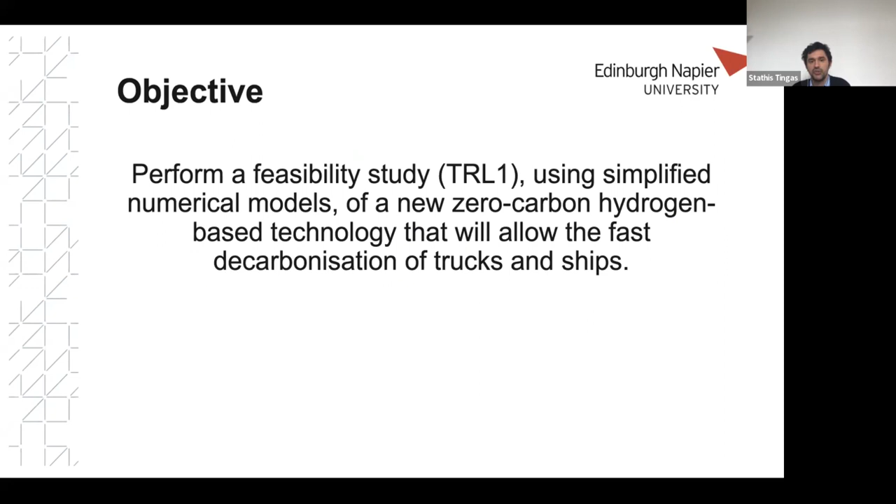In a nutshell, the objective of the current project is to perform a feasibility study using simplified numerical models of a new zero-carbon hydrogen-based technology that will allow the fast decarbonization of trucks and ships. I will first talk about the motivation of this work to introduce a green ignition promoter. Then I will briefly highlight the aim and individual objectives of this work. Next, I plan to dedicate most of the time discussing the results obtained so far, and at the end I will also discuss the remaining elements of this work.

As I already mentioned, the project focuses on heavy-duty transport applications like ships and trucks. But why? What's the problem there? Well, the decarbonization of these applications through electrification has not been very attractive so far, and there are many reasons for that. I'm not going to discuss them here, but there seems to be a consensus both among policymakers and the research community that there is no clear solution to their decarbonization.

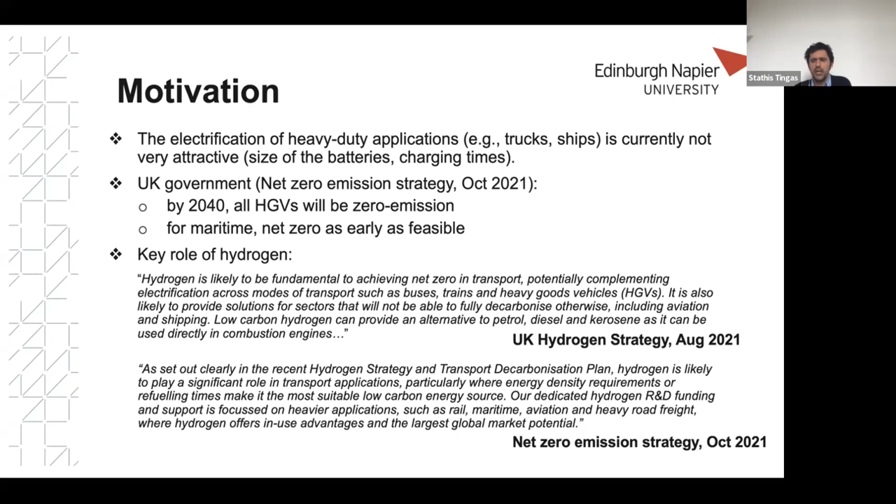Yet the UK government has set clear goals in this regard. All trucks will need to be zero emission by 2040, and notice that this is a decade later than the 2030 ban of all new diesel and gasoline vehicles. With regard to ships, the aim is to reach net zero as early as feasible. At the same time, hydrogen has been identified as a key player in the decarbonization of our society, not only in the UK but also globally.

So one question can naturally rise, which is: can we use hydrogen to decarbonize these heavy-duty transport applications? Well, there is the option of fuel cells, but they are typically quite expensive, so the industry is not very keen to buy into the idea. Ideally, we would like to have a technology relying on retrofitting.

Now, both ships and trucks are predominantly powered with compression ignition engines. So can we just replace diesel fuel in these engines with hydrogen? Well, it's not that simple, because hydrogen simply wouldn't burn. Hydrogen has many unique features, and one of these is its very high autoignition temperature, which explains why it does not burn in conventional compression ignition engines.

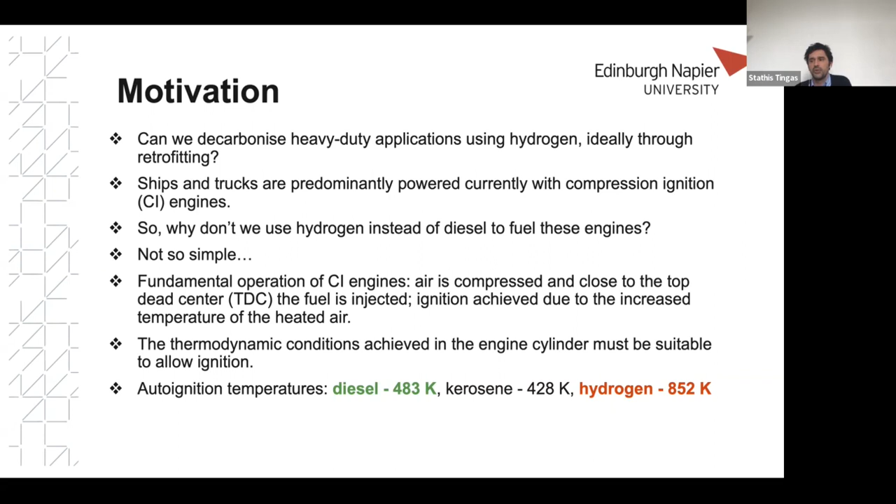Okay, so how can we tackle this? How can we basically burn hydrogen in compression ignition engines? Well, three strategies have been proposed so far. The literature for the first two is quite scarce. The last one is more popular, and you will see why.

The first approach is to use very high compression ratios, above 30. High compression ratios mean that the in-cylinder temperature will be sufficiently high to enable the ignition of hydrogen. Compared to the typical range of 15 to 20 that conventional compression ignition engines currently operate, this basically means engine redesign, which is not cost-effective.

The second approach is to use a glow plug. This glow plug will preheat the in-cylinder air or the in-cylinder charge. This is not actually a bad idea, but the preheating leads to decrease of the engine performance and in certain cases also to high NOx emissions.

Now, the last approach is to use a small quantity of a second fuel, usually called a pilot fuel, which is more reactive than hydrogen in order to initiate the ignition. There are many benefits with this approach: one is the flexibility in operation, other is the increased efficiency, and many others. But so far, only carbon-based fuels have been proposed for use. In fact, most of the times, the pilot fuel was proposed to be diesel.

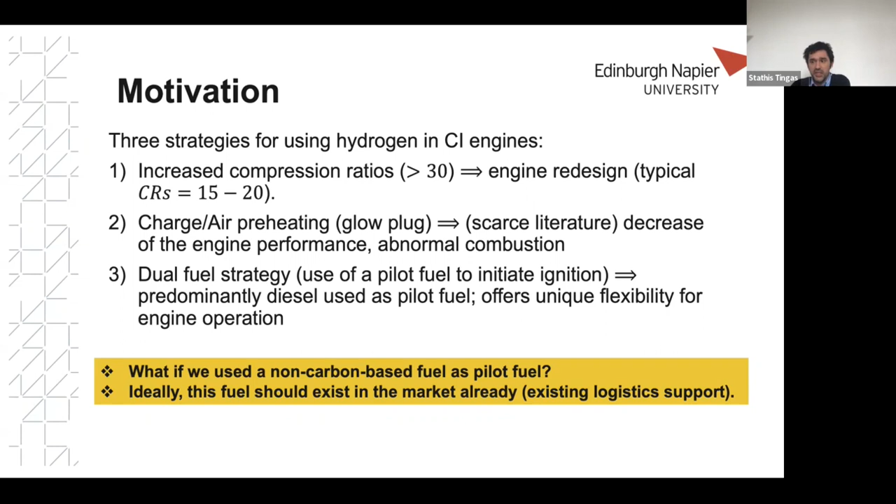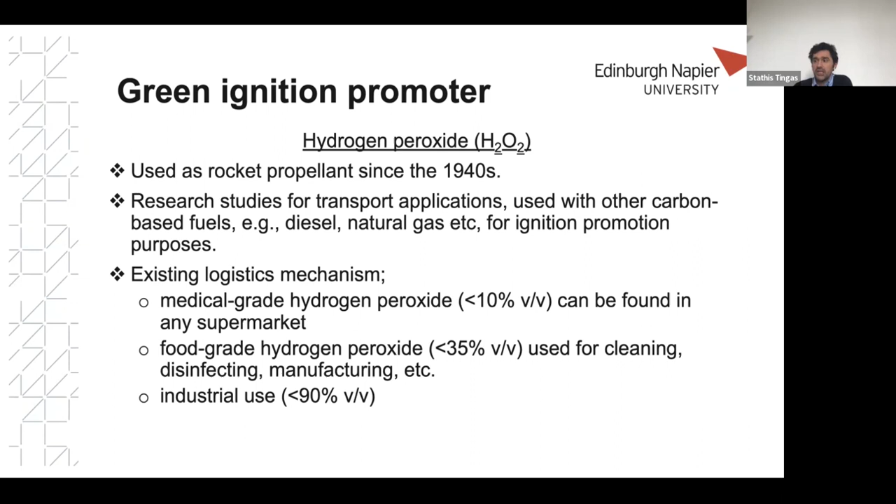So is there any such substance? As a matter of fact, there is. It is hydrogen peroxide, and you can literally find it in any convenience store or supermarket in diluted form, diluted in water. The idea of using hydrogen peroxide in combustion is not actually new. It dates back to the 40s, when it was first used as a rocket propellant and fuel for submarines. But apart from military and aerospace applications, where it is used even nowadays, it has also been used in transport-related applications, where it has been used as an ignition promoter, just like we propose in the current project.

So what we propose is the use of hydrogen and hydrogen peroxide blends to enable combustion in compression ignition mode. We also consider water dilution for two reasons. Firstly, because hydrogen peroxide would most probably need to be diluted in water anyway. And secondly, because water dilution is an established method for reducing NOx and mitigating abnormal combustion.

Given the limited resources and time in the current project, we have been using simplified numerical models to explore the feasibility of the proposed method. Our investigation includes two branches: the homogeneous charge compression ignition mode, the HCCI mode, and conventional compression ignition mode - basically, pre-mixed and non-premixed combustion modes.

Due to the limited time, I will be discussing next the results from the HCCI mode, which is the work package I have been leading, while the compression ignition mode is led by Professor Manosh Paul. Our investigation focuses on engine performance characteristics, combustion phasing, and NOx under various conditions. We are also aiming to touch on the limitations of abnormal combustion as manifested by increased pressure rise rates, and to provide some insight on the available injection strategies.

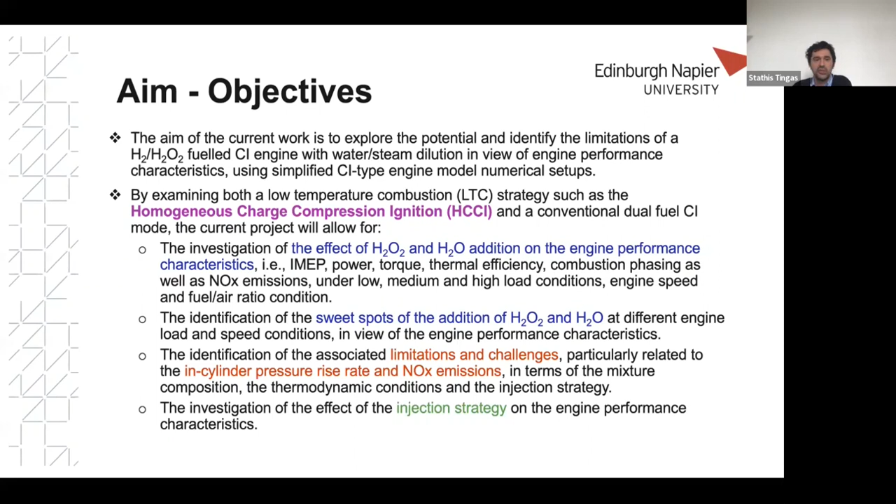I already mentioned that the model we have been using is fairly simple. It is a zero-dimensional single-zone HCCI model available in the Chemkin Pro suite, which solves the species and energy equations along with an additional equation for the volume change. The engine cylinder specifications, typical of a conventional compression ignition engine, are shown in the current table.

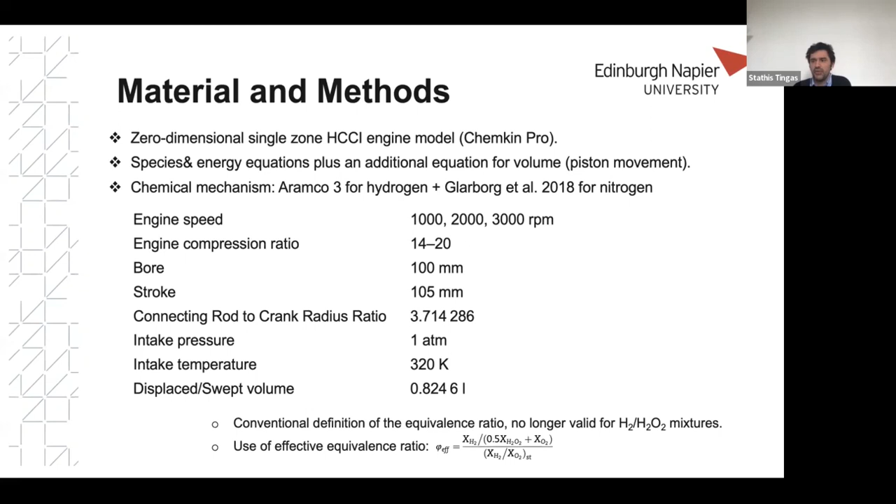One thing to note is that although we did investigate a range of compression ratios, in the following I will only show results for the case of compression ratio equal to 17, since this is more relevant to the applications we are interested in. Another point to highlight is that the conventional definition of the equivalence ratio is no longer valid, so we have been using an effective equivalence ratio defined as shown in the current slide. I have organized the results in two sections. In the first, we only consider hydrogen and hydrogen peroxide blends, so no steam addition.

These results have recently been published in the International Journal of Hydrogen Energy, so you can find more details there.

For this case, I will start with a comparison against the glow plug approach, that is the preheating of the mixture. Then discuss the effect of hydrogen peroxide addition on the engine performance and close with the investigation under constant and low load conditions. The second section includes steam dilution as well. Unlike the first part, these results have not been published yet since we're currently working on the manuscript. Firstly, I will present a comparison against the glow plug approach, then discuss the effect of both hydrogen peroxide and steam addition on the engine performance, and close with the investigation under constant and high load condition. So let's start with the first part.

Now, the investigation was performed in a range of equivalence ratios and engine loads. Each case of hydrogen peroxide addition is compared against the respective glow plug approach, which means we remove the hydrogen peroxide and properly increase the inlet temperature. Now, for a fair comparison, we ensure that the ignition occurs at exactly the same crank angle degrees between the two cases.

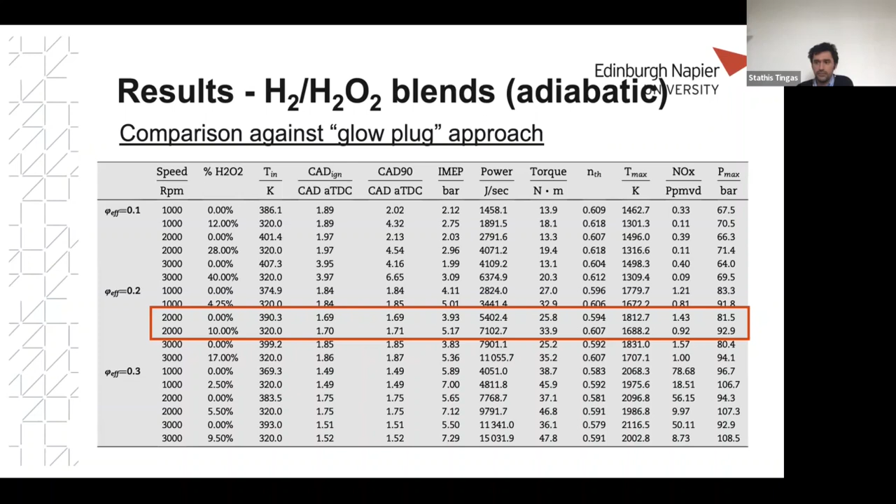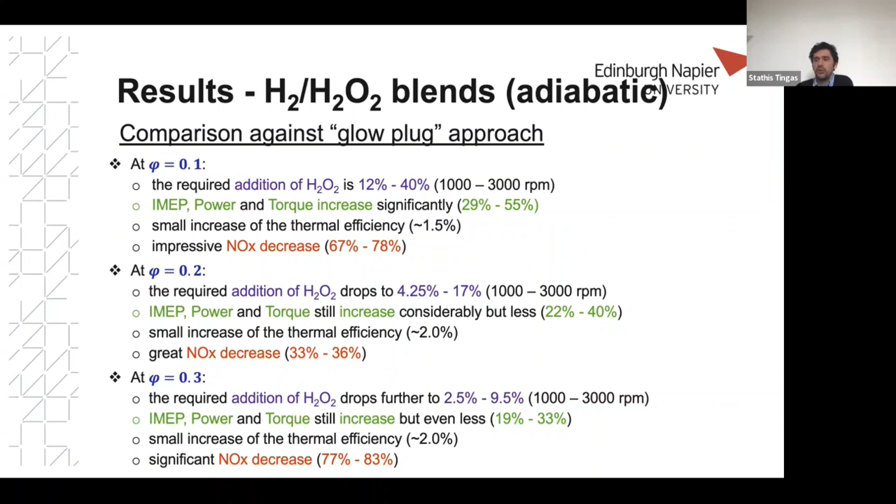In summary, the comparison against the glow plug approach reveals that as the mixture becomes richer, firstly, the required hydrogen peroxide addition to achieve ignition at roughly 2 angle degrees decreases substantially. Secondly, Imep, power, and torque all increase significantly with the addition of hydrogen peroxide. But as the mixture becomes richer, their increase drops. On the other hand, hydrogen peroxide addition also affects thermal efficiency and NOx. But as the mixture becomes richer, its impact remains unaffected, in that thermal efficiency only slightly increases while NOx decrease substantially.

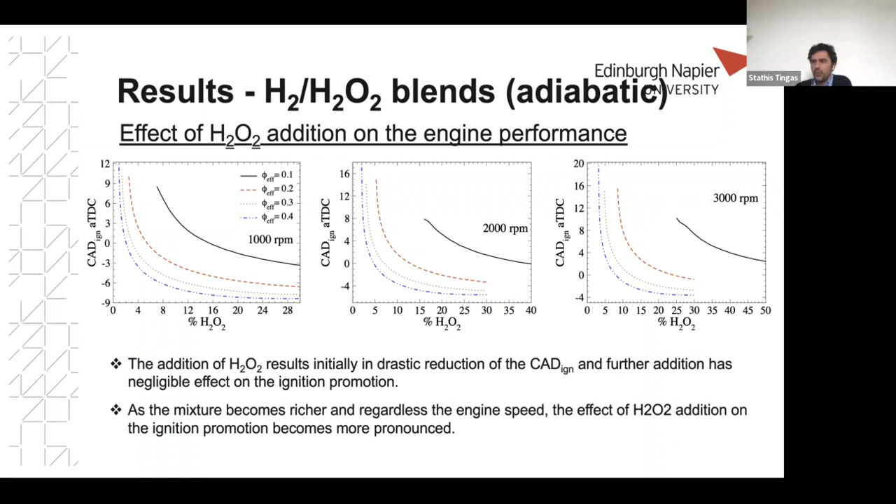The results already discussed provide us some insight as to what to expect when we are investigating the incremental increase of the hydrogen peroxide content at the initial mixture. So in terms of the ignition crank angle degrees, the addition of hydrogen peroxide results initially in drastic reduction of the ignition CAD, and further addition has negligible effect on the ignition promotion. Therefore, the ignition CAD levels off. This profile becomes attenuated at very lean conditions, that is at phi equal to 0.1. And in fact, as the engine speed increases, the dependence of ignition CAD on the hydrogen peroxide becomes roughly linear. In essence, as the mixture becomes richer, and regardless the engine speed, the effect of hydrogen peroxide addition on the ignition promotion becomes more pronounced.

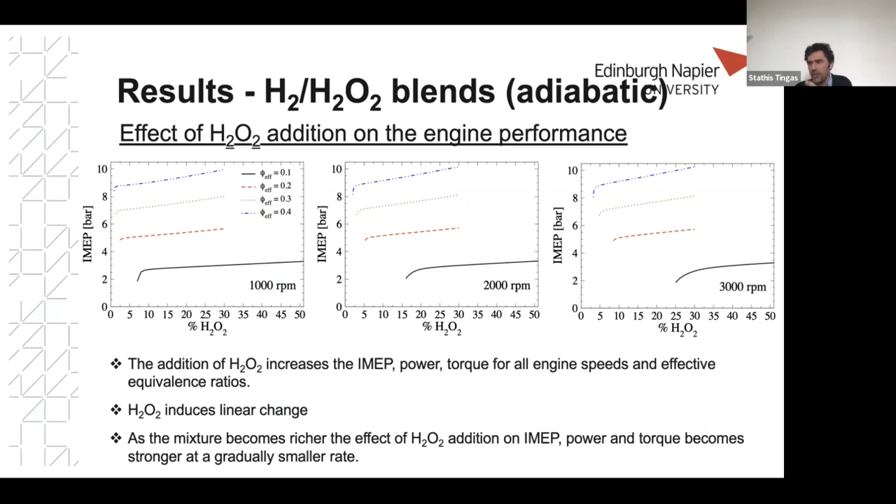Now, in terms of the Imep, the increase that hydrogen peroxide induces seems to be mostly linear. If we were to look at the gradients of these profiles as a measure to assess the sensitivity of Imep to the hydrogen peroxide addition, we would find out that as the mixture becomes richer, hydrogen peroxide addition results in stronger impact. So the gradients basically become steeper, but the rate of this change becomes smaller. What I mean is that the change of the gradient from phi equal to 0.1 to 0.2, this change is larger than the change from 0.2 to 0.3. And that is larger in turn than the change from phi equal to 0.3 to 0.4.

Now, it is interesting now to compare the variation of the thermal efficiency against Imep for various engine speeds, while maintaining constant the effective equivalence ratio. The variation in the load is achieved by varying the percentage addition of hydrogen peroxide. Firstly, the maximum thermal efficiency for each case of equivalence ratio and engine speed does not coincide with the maximum Imep value.

This is due to the enhanced ignition advancement that is achieved by the addition of hydrogen peroxide, which promotes the ignition occurrence to the angle degrees before the top dead center.

In addition, at constant phi and low load, the engine speed appears to move the curve to the right. That is, the same efficiency is achieved by the same Imep difference between two speeds. This justifies why at constant phi, the same thermal efficiency is achieved at all engine speeds.

However, while the engine load is increased further beyond the threshold corresponding to the maximum thermal efficiency, the thermal efficiency starts dropping at constant phi, and there is great variation in the response of the thermal efficiency due to engine speed. It is worth noting that the Imep and thermal efficiency values reported in our work are significantly higher than those reported in earlier works that achieved experimentally hydrogen use in HCCI mode with appropriate preheating of the charge.

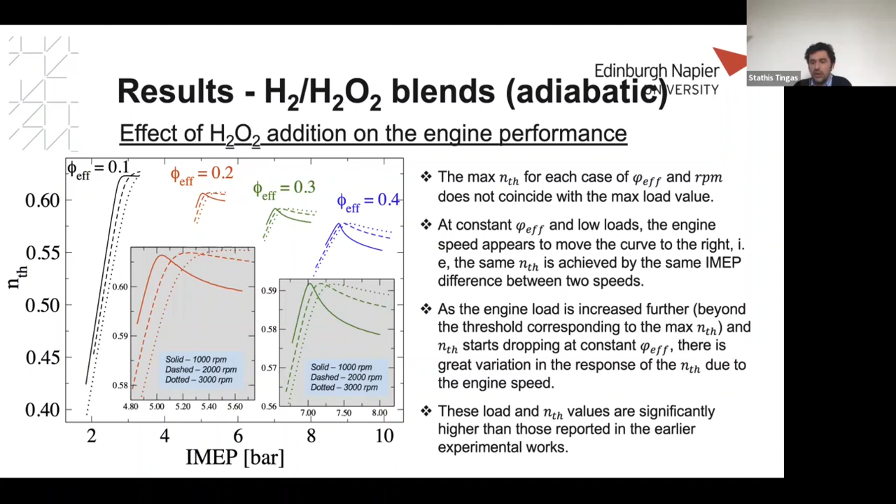An important aspect in hydrogen-fueled engines that requires special attention is that of NOx emissions, which can become quite high, especially when compared with conventional fossil fuels.

At sufficiently low effective equivalence ratios, that is phi equal to 0.1 or 0.2, NOx emissions are so low that they would not require any after treatment, regardless of the engine speed. This is the result of the relatively low maximum temperatures reached.

However, for higher equivalence ratios, NOx emissions increase rapidly and reach values which may necessitate after treatment or the use of additional strategies to combat the increased emissions, such as the use of water or exhaust gas recirculation, EGR.

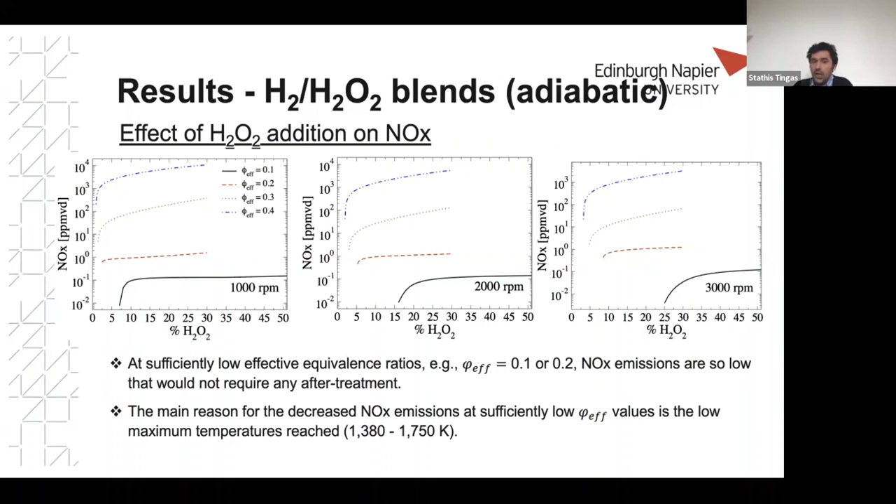Now, in the last part of the analysis, we gradually increase the hydrogen peroxide content while also reducing the equivalence ratio in a manner that the load is maintained constant at 33.8 newton meters. And we did that for a range of engine speeds.

This section further corroborates the strong effect of hydrogen peroxide addition on the thermal efficiency, particularly at 2000 and 3000 RPM. In view of the thermal efficiency, the hydrogen peroxide addition has practical value for percentages equal or larger than 4% at 1000 RPM, 6% at 2000 RPM, and 8% at 3000 RPM.

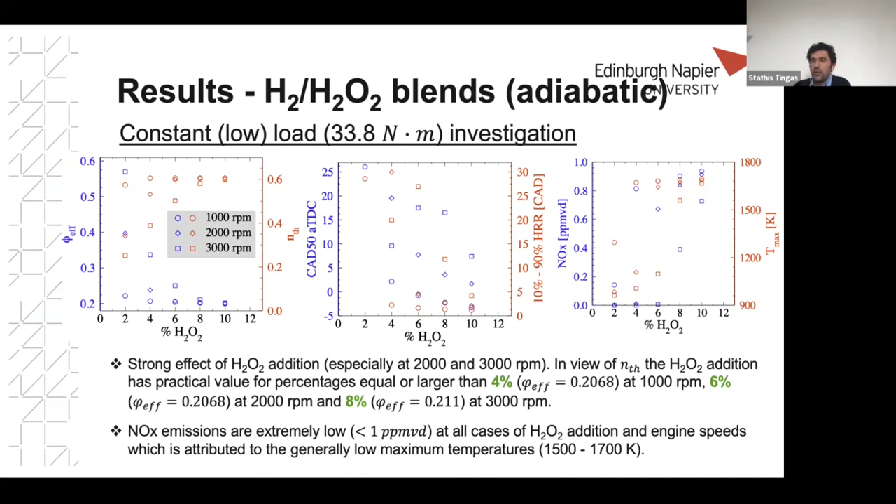In addition, it is shown that NOx emissions are extremely low at all cases of hydrogen peroxide addition and engine speeds, which is attributed to the generally low maximum temperatures between 1500 and 1700 Kelvin. These results highlight the potential of the proposed technology requiring no after-treatment for the NOx emissions at low loads.

So we covered the first section of the analysis. Let's now add steam dilution into the system to see how this would work.

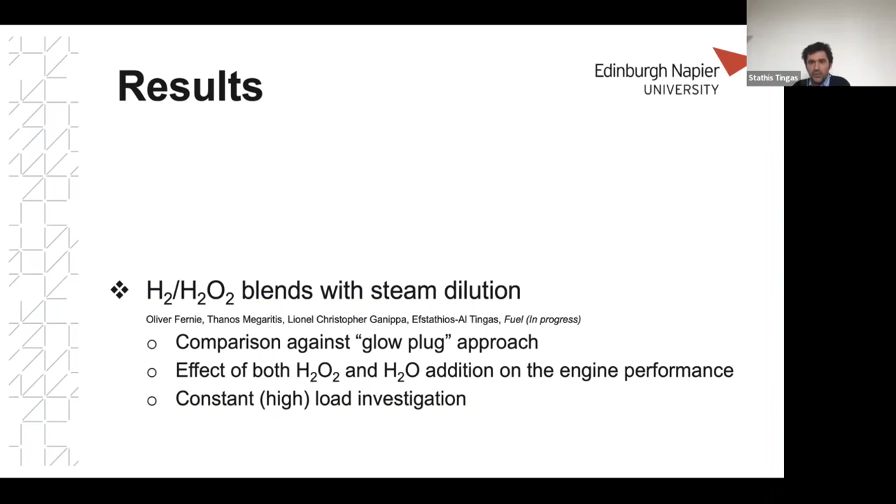Now, similar to the earlier scenario, we compare our approach against that of a glow plug in terms of performance and NOx. So for each case of hydrogen peroxide addition, we ran another without any hydrogen peroxide, but having properly increased the inlet temperature to achieve the same ignition CAD.

Now, unlike the previous scenario, we are now considering steam dilution. So, for instance, at phi equal to 0.5, 3000 RPM, and 10% of water dilution, we need 7.3% hydrogen peroxide to achieve ignition at 5 degrees.

But if we remove the hydrogen peroxide, we would need to increase the inlet temperature to 393 Kelvin to achieve the same ignition delay time. You can clearly see that with our approach, that is, with the addition of hydrogen peroxide, Imep and torque increase significantly and NOx production decreases greatly.

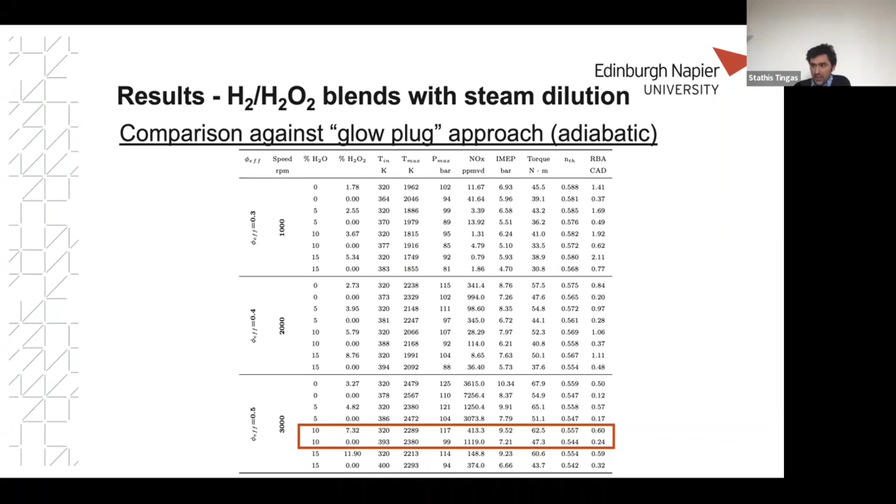Three points I would like to make here. Firstly, NOx decreases significantly with the addition of hydrogen peroxide, in agreement with what we found in the case of no steam dilution. And this reduction is associated with a decrease of the maximum temperature.

Secondly, Imep, torque and power exhibit considerable increase with the addition of hydrogen peroxide. What is interesting is that this increase is favored with the increase of either the steam dilution or the equivalence ratio. Finally, thermal efficiency increases slightly with hydrogen peroxide, just as we showed earlier.

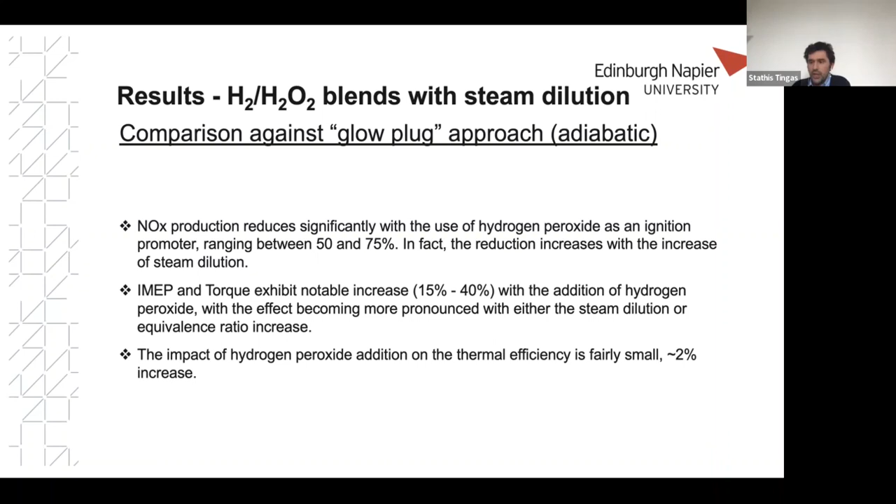Now, staying a little further on the comparison against the glow plug approach, what we did next was to first consider heat losses, and secondly, to keep fixed the hydrogen peroxide content at 5% and add incrementally steam dilution into the system from 0 to 10%.

Then we removed the hydrogen peroxide and tried to replicate the same load output by properly increasing the inlet temperature, and the result in terms of Imep and torque is shown in the figure on the left.

In most cases, increasing the inlet temperature was not sufficient, so we also properly increased the equivalence ratio, as shown in the figure in the middle. For instance, to achieve an Imep value of 7.4 with 6% steam dilution, with hydrogen peroxide we achieved that by adding 5% at phi equal to 0.4. But with the glow plug approach, we had to increase the inlet temperature to 376 Kelvin, 56 Kelvin more, and the equivalence ratio to 0.535, a 34% increase. The figure on the right compares the two approaches in terms of thermal efficiency and NOx emissions.

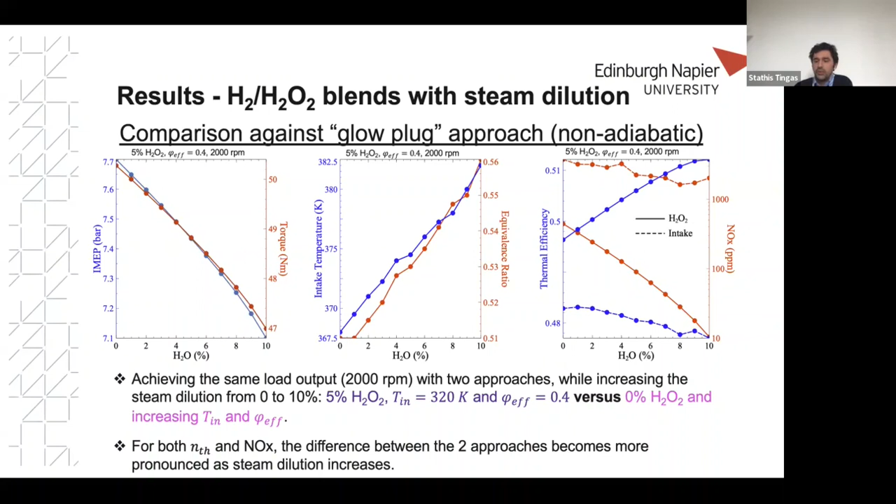Next, we consider the effect of both hydrogen peroxide addition and steam dilution on Imep and NOx emissions. The x-axis represents the hydrogen peroxide addition, and the y-axis denotes the steam dilution. Red color is for low values, purple for high values. We're interested in areas where NOx are low, that is red, and Imep is high, that is purple. Generally, both Imep and NOx increase with hydrogen peroxide addition and decrease with steam dilution increase. At 1000 RPM where phi equals 0.3, NOx are low for all conditions except perhaps for hydrogen peroxide higher than 15% and steam dilution less than 3%.

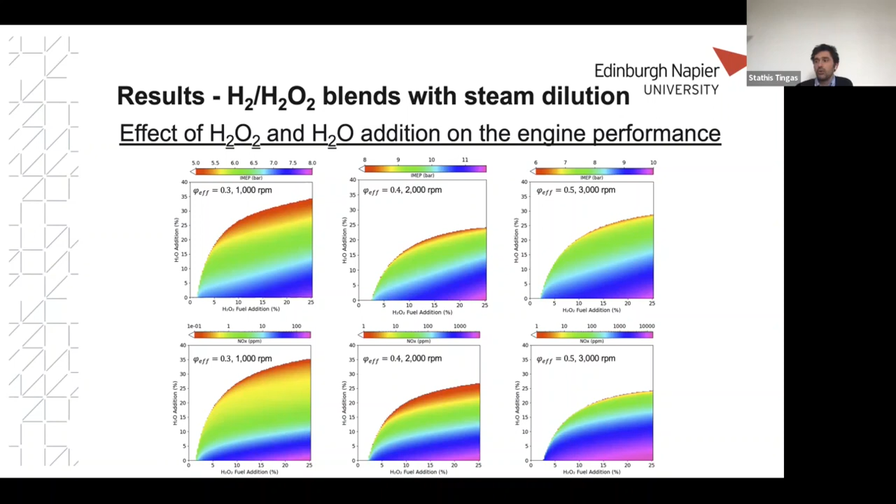An Imep of 6 bars can very well be reached with 10% hydrogen peroxide and 5% steam dilution while maintaining NOx extremely low. At 2000 RPM and phi equal 0.4, an Imep of 10 bars can be obtained with just 10% hydrogen peroxide and 5% steam dilution, while keeping NOx very low at around 100 ppm. These results show that steam dilution can be an effective tool for reducing NOx emissions significantly, while achieving good load outcomes with no more than 10% hydrogen peroxide.

Similarly to the scenario of no steam dilution, in the last part of the investigation we incrementally increased the initially introduced steam dilution, but to maintain torque constant at 65 newton meters, we also increased the initial hydrogen peroxide. At first glance, at phi equal to 0.4, the hydrogen peroxide must be more than 30%, which is not very convenient since we'd like to keep it lower than roughly 15 to 20%. At phi equals 0.5, we can achieve the desired load outcome with low hydrogen peroxide percentage, but we'd also need to sufficiently increase the steam dilution to avoid high NOx.

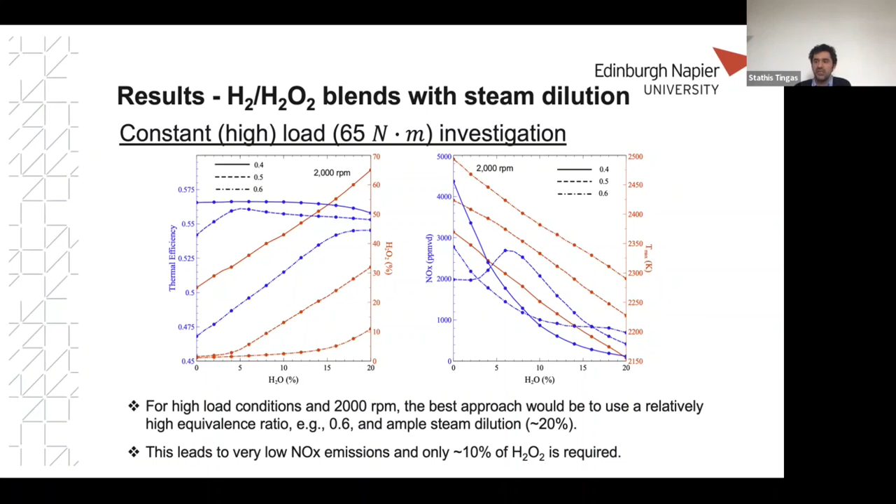But then the required hydrogen peroxide would have to increase to more than 20%. On the other hand, at an equivalence ratio of 0.6, we can achieve the desired load output with hydrogen peroxide being less than 10%. But NOx drops substantially only when steam dilution is sufficiently increased to 15 to 20%.

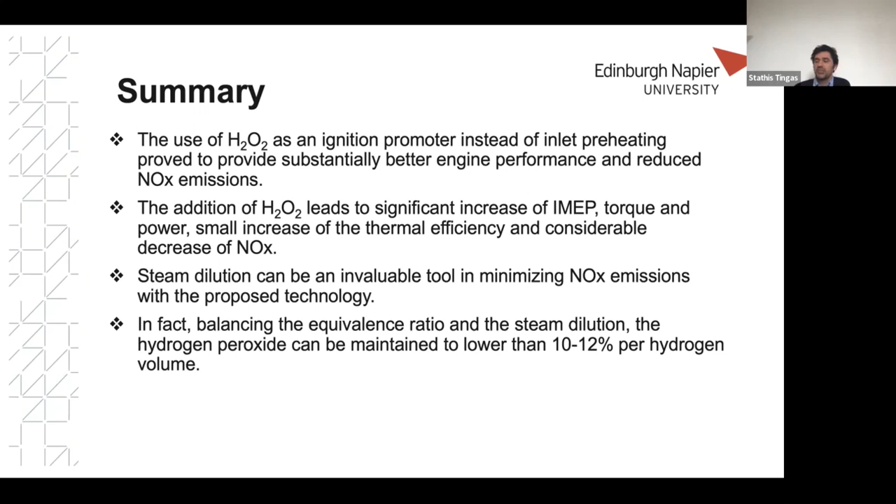All these preliminary findings reveal that the proposed approach seems very promising since, firstly, it's clearly advantageous against the glow plug approach and preheating of the charge. Secondly, the addition of hydrogen peroxide increases Imep and torque while greatly decreasing NOx emissions. Thirdly, steam dilution could be an invaluable tool offering unique operational flexibility since it can tremendously reduce NOx emissions. That, combined with balancing the equivalence ratio, can require less than 10% hydrogen peroxide, regardless of the operational requirements.

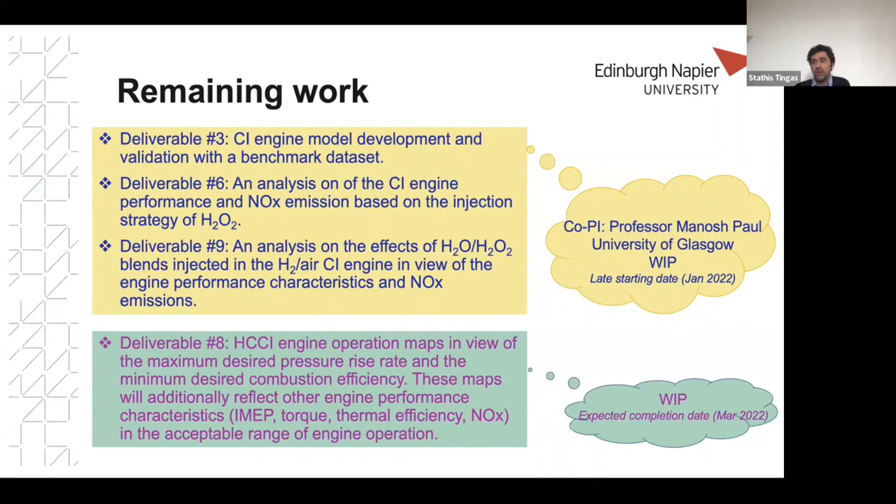So what is left to be done in this project? The work led by Professor Manosh Paul is still in progress since it only started last month due to bureaucracy, so its completion has been extended to late June. That will be a very interesting part because it focuses on the conventional compression ignition engine mode. As for my part, there is one thing currently in progress, expected to be completed next month, and that is the limitations introduced due to the pressure rise rate and combustion efficiency.